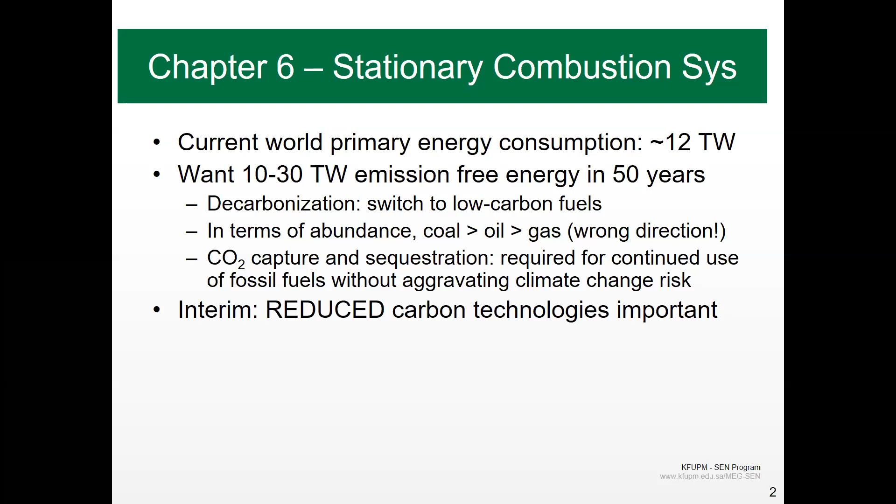Probably you've read that some countries in Europe have decided to go for electric cars 100% by 2035 or 2040, depending on the country, but there's some direction into going for electric cars in the future. They're going to replace, maybe not 100% in the next few decades, but eventually that's something to be expected.

Coal is being used heavily in some places like China, Russia, and the United States. There are grades of coal - some are cleaner than others, but it still remains an issue related to the carbon emissions that are products of the combustion process.

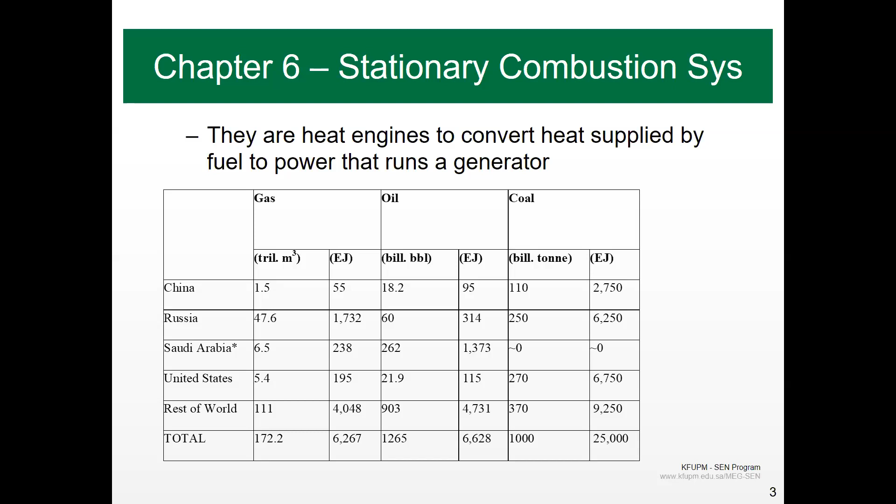Every now and then we get news about building the biggest world solar power plant. It was in Australia about a decade ago, and last year a bigger one was built in Morocco. So there is motion in this direction of generating electricity.

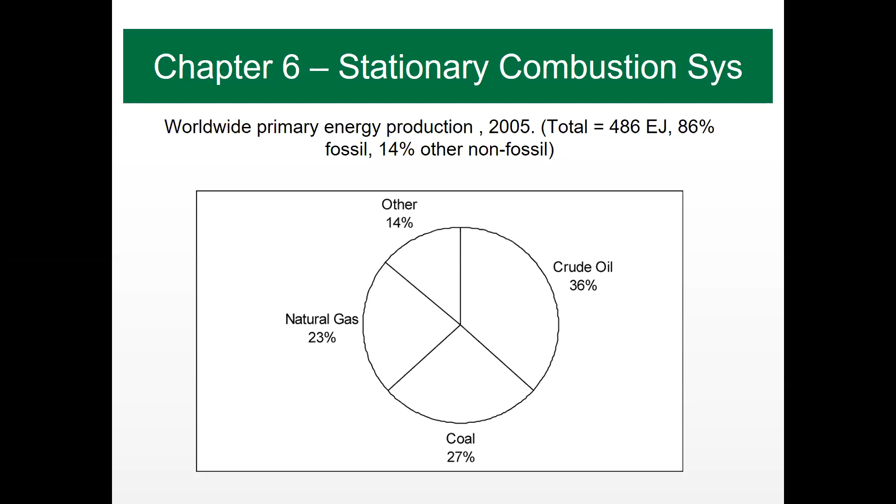Thermal heat was the major part in the last couple of decades. Now people are considering more dependence on PV, especially as the price of PV panels has dropped - the technology has become available and the price dropped in the last decades to about one third of its original price. So there's a continuous decrease in the price of materials that depend on solar energy, making investment in solar energy less significant than it used to be. Still, it's on the high side especially for capital cost, but this cost is being reduced as people move from one technology to another.

Fossil fuel availability, cost, and carbon dioxide emissions is something we're interested in, and this is being covered in the current chapter of the book we're getting into, the stationary combustion system.

The basic combustion cycles - we started last time talking about the Rankine cycle. We'll continue today talking about the Rankine cycle, probably give a detailed example of analyzing a problem with the Rankine cycle, and some improvements introduced to the cycle to increase performance in terms of efficiency and work done. Next time, two weeks from today, you're going to start considering another thermodynamic cycle, the Brayton cycle.

The Brayton cycle is the basic cycle behind the operation of gas turbines. Power production in the kingdom is basically distributed between steam turbines (Rankine cycle), gas turbines, and combinations of them. For example, the power plant located in Jubail by Marafiq Company has a combination - steam turbines and gas turbines together. The steam turbines are needed to operate desalination, water desalination units, while the Brayton cycle produces power.

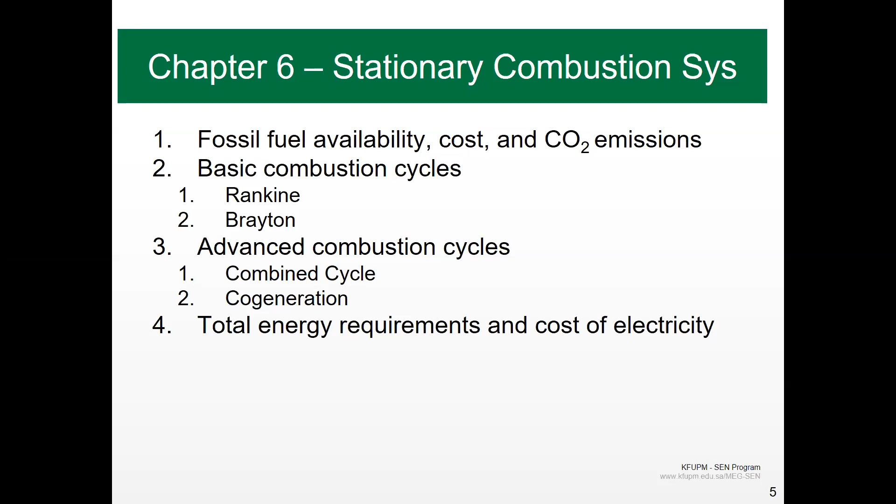The pump here has a process going from state 1 to state 2, which is compression of liquid water. Here we assume it's an ideal Rankine cycle, so basically there's no increase in entropy. Whereas from point 2 up to 3, this is a constant pressure line.

If you remember in the first class, we said that when you are heating water at atmospheric pressure or at a certain pressure, it goes through sensible heating first, and then after that, it goes through a constant temperature phase change. After all of it has been converted from liquid to vapor, it goes through an increase in temperature again. All of this occurs at a constant pressure.

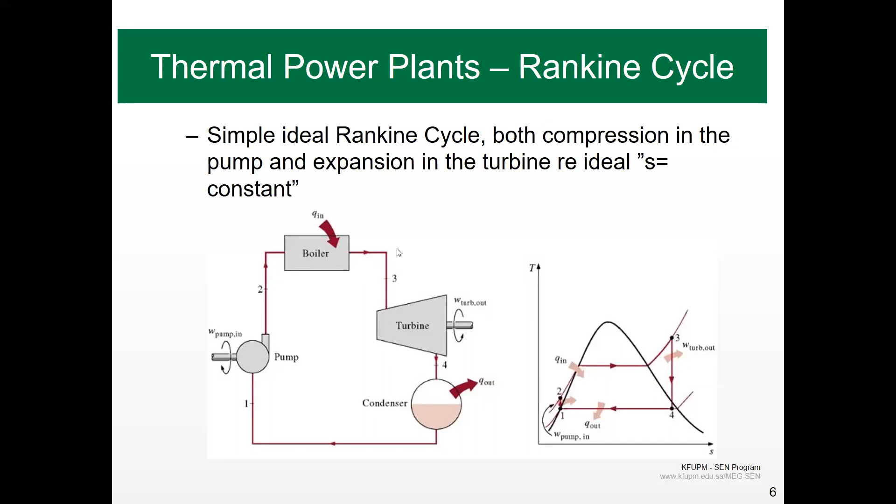But for our analysis, what we are interested in basically is the kind of irreversibilities associated with compression and with expansion. But we will always assume that this is going to be a constant pressure line.

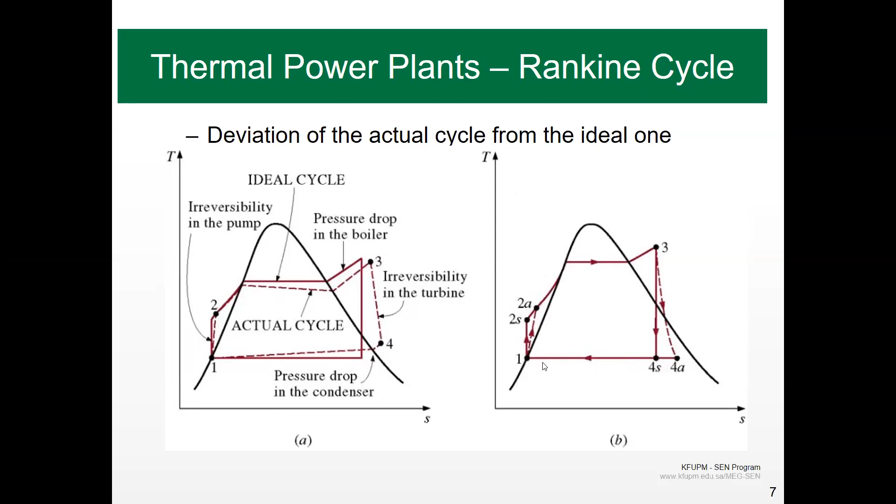Now, coming to another issue: if this is the Rankine cycle and you need to improve its performance, what can we do? Improving the performance means we need to increase the work done and the efficiency, keeping the heat input the same, which is what's being assumed in this figure.

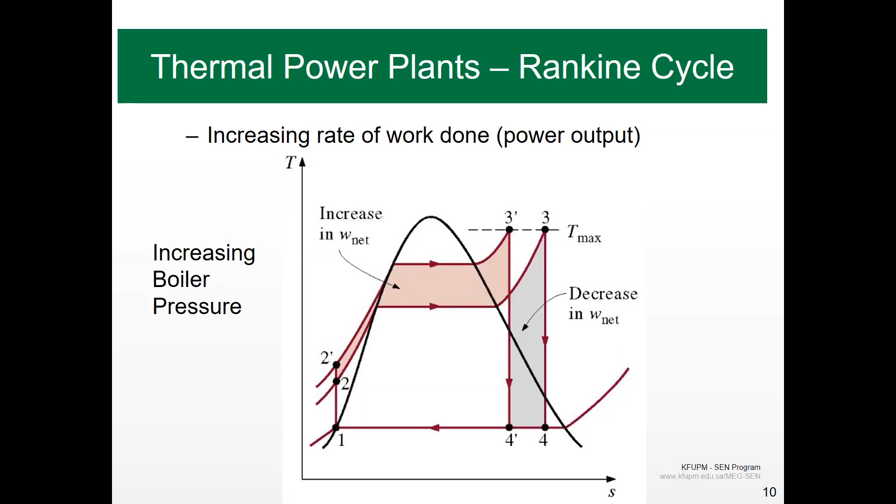Or maybe going for what is called a supercritical cycle, in which you increase the pressure to a value beyond the critical pressure of H2O or water, and hence you are basically going above the critical point and reaching state number 3. Then you will have a substantial increase in the work done. But Q is going to increase as well, as is the power needed by the pump. So again, that's something that needs to be looked at—how much benefit we are going to get out of doing that.

So we're talking about four types of processes that we can use to improve work done and efficiency of the cycle: decreasing the pressure of the condenser, increasing the degree of superheat, increasing the pressure of the boiler, or even going for a supercritical Rankine cycle.

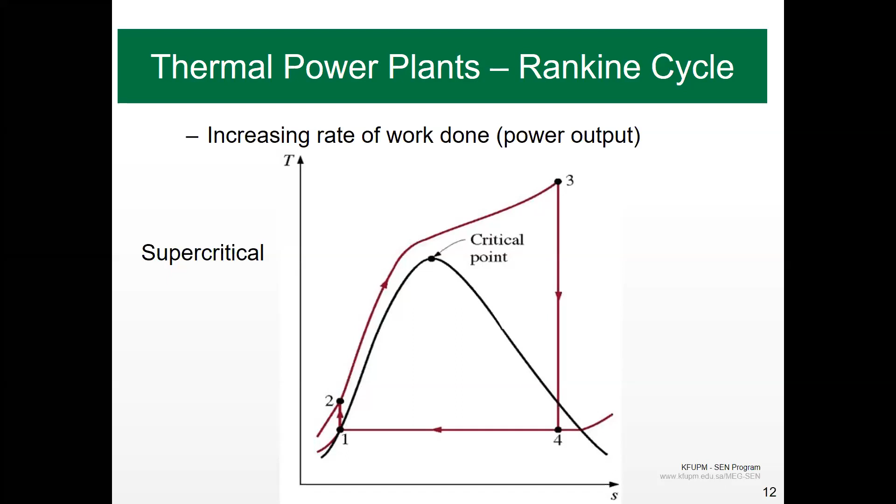But these are not the only ones. There are other ways you can improve the performance of an existing unit without having to increase or decrease pressures. These are basically comparisons considering 3 of the 4 scenarios that we talked about.

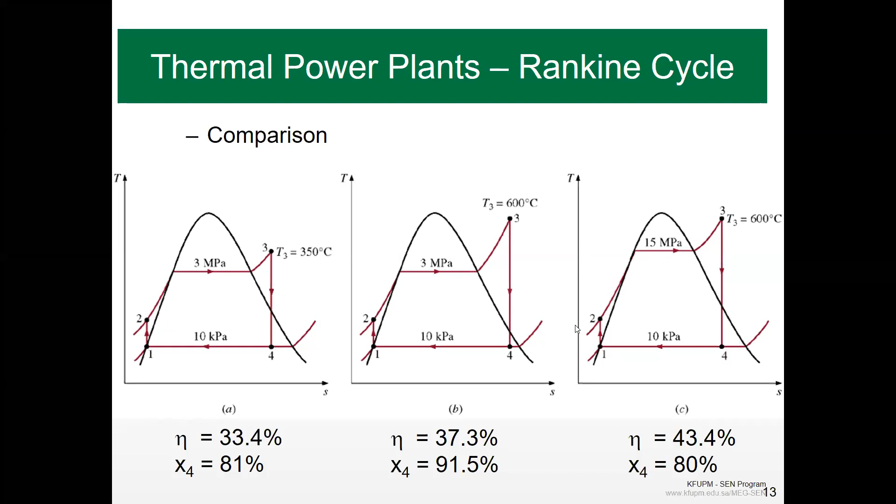There's a solution for that, and it can be done in a process we call reheating of steam. This is what we need to talk about now. You might divide the expansion in the turbine into two processes, so you have a high pressure turbine and a low pressure turbine. The steam that is expanded in the high pressure turbine is taken back again to the boiler to be reheated. That's why it's called the ideal reheat Rankine cycle. You reheat the steam leaving here, then admit it to a low pressure turbine.

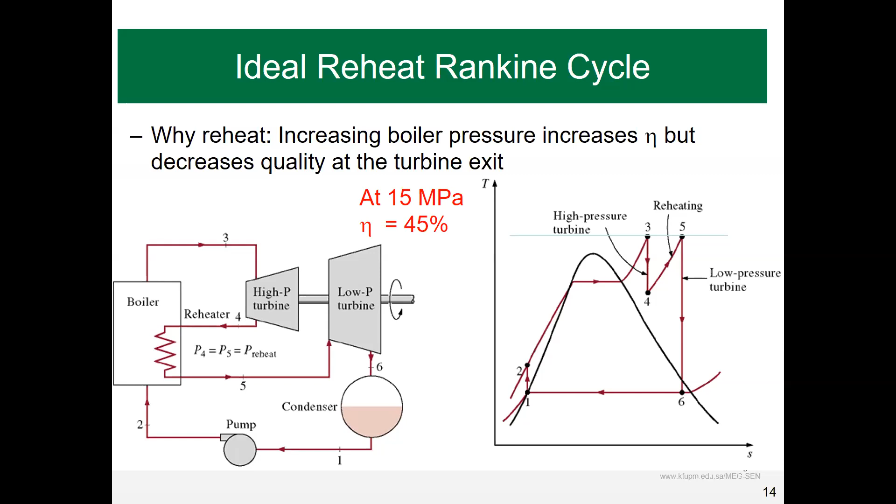This looks like a theoretical thing, just imagining ideally what would happen. In reality that does not occur, but what we can do is approach as high a temperature as possible for the inlet to the boiler, and this is done by using more than one feed water heater.

So this is the idea of regeneration. The water that enters the boiler goes in at a low temperature and is heated to the maximum cycle temperature, so we're talking about an average temperature which is somewhat low. We need to increase it, because doing so gets us closer to the idea of the Carnot cycle. This can be done by reheating, but that's not enough—it can also be done by regeneration.

So that we bleed or extract a portion of the steam in the turbine, and use that for preheating the feed water which is going to feed the boiler. That's why it's called a feed water heater. So the device in which heat is added to the feed water is called a feed water heater.

Regeneration has been found useful in processes other than just heating the water. In the condenser, which is a low pressure process, as vapor condenses there's a possibility of creation of non-removable, non-condensable gases. Air can leak into the condenser, since it operates at a very low pressure, so air might leak inside.

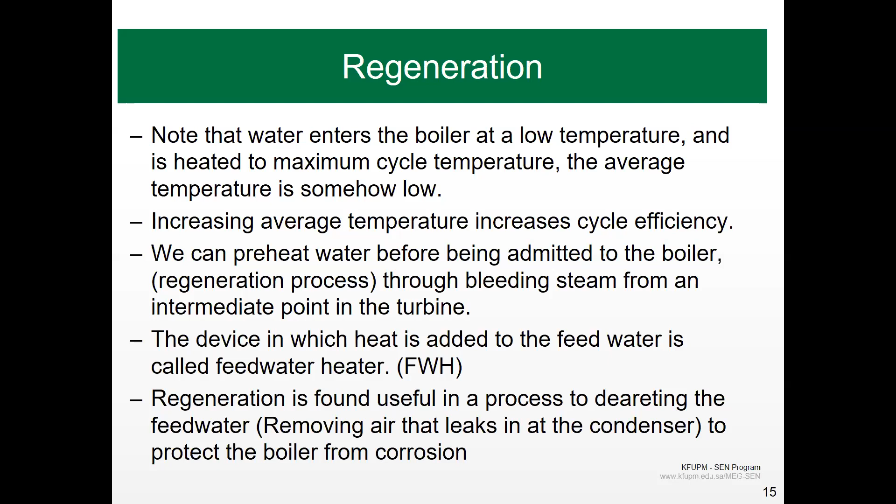We don't want air admitted to the boiler at all, because with the high temperature in the boiler and air present, oxidation would occur and result in corrosion. So we need to avoid that, meaning we need to remove air from the water that will go into the boiler. This is a process called de-airing or deaerating the water before it gets into the boiler.

One of the feed water heaters is an open type feed water heater, and it is working as a deaerator at the same time. So you are preheating the water in a preheater. Meanwhile, you are taking out air from this stream, and that enhances the performance of the whole cycle. So that's an open water heater, which is nothing but a mixing chamber.

Someone had a question? Yes, go ahead. So you are saying that we will be using a deaerator only if we have a feed water heater, is that correct? Actually, what I want to say is that a feed water heater is a deaerator at the same time.

The feed water heaters are two types: one is open and the other is closed. So if you are going to have a power plant, we might need only one open feed water heater, and 3 to 4, up to 7 practically speaking, closed feed water heaters. We need only one open feed water heater to work as a deaerator, and the rest are basically closed feed water heaters.

So what I want to say is most, or actually all, of the modern plants that are operating used to have feed water heaters. That's something which is standard to the technology now, because it's a tool to improve performance.

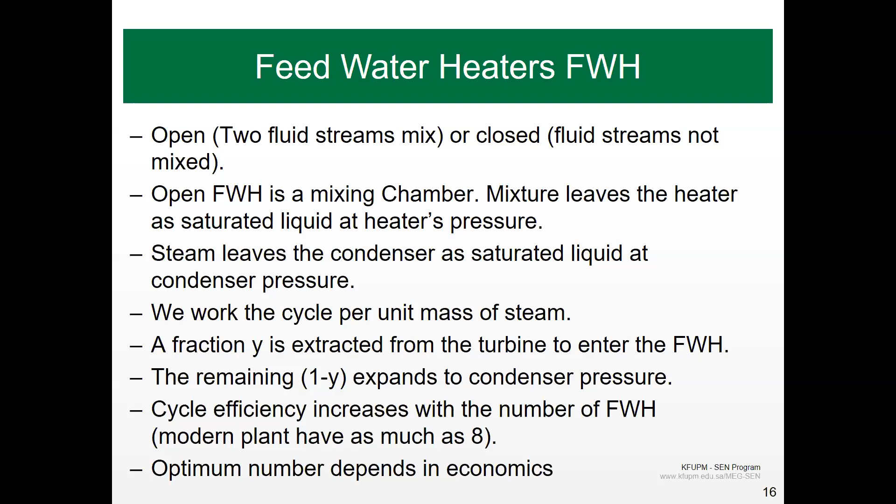Saturated liquid goes to the pump, where it's pumped to a higher pressure, becoming a compressed liquid. Then it enters the feed water heater, where it mixes with a line of steam extracted or bled from the turbine.

This line of steam operates by heating this stream of water. The mixture occurs because this is steam coming in and this is water; the steam condenses into liquid, giving off its energy to that stream of water, so the saturated liquid leaves here at a higher temperature.

It will enter the second pump, where it's pumped to state number 4, and then the whole stream goes to the boiler for heating, superheating, and then it expands in the turbine at an intermediate pressure.

At this point, extraction occurs - fraction Y is extracted, and the rest, which is 1 minus Y, expands, condenses in the condenser, and goes to pump number 1, and the cycle repeats.

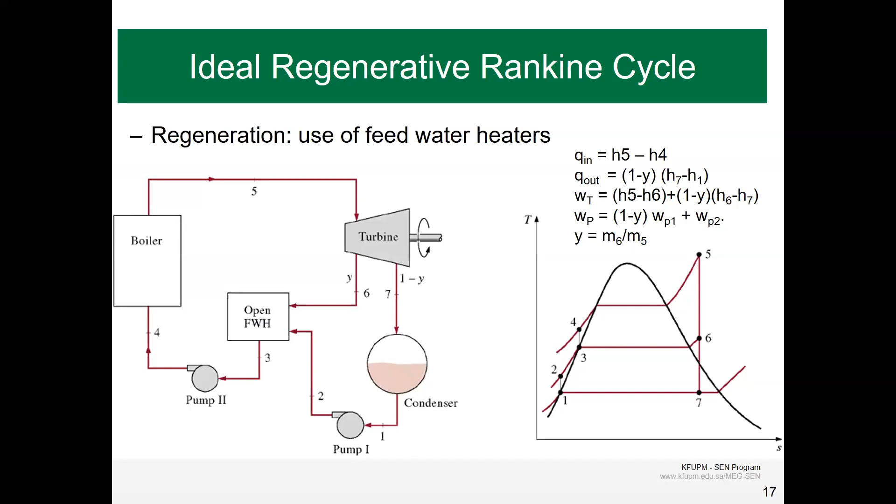So that is what you see typically in heat exchangers. You have a tube side and a shell side. The tube side has liquid water that's pumped through. This liquid water receives energy from the steam, and the steam condenses on the outer side of the surfaces. Then the condensate is pumped to the next one. So here they are not mixed with each other.

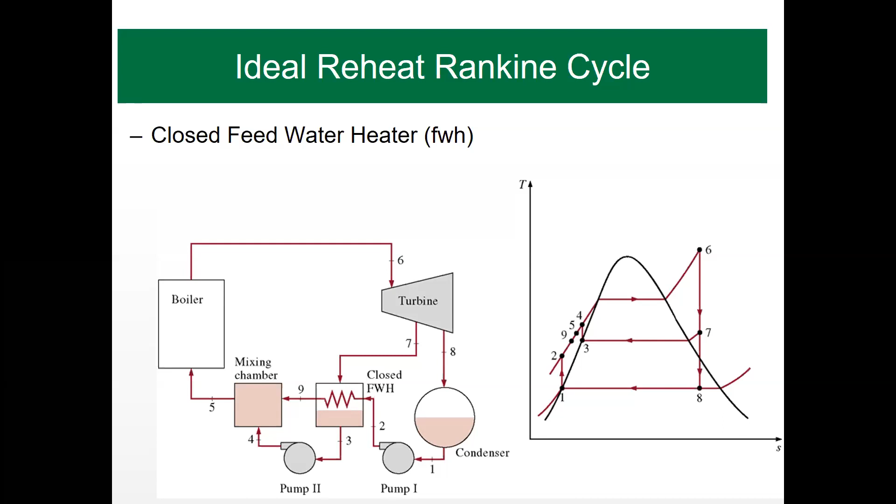Actually, you have a high pressure turbine, intermediate pressure turbine, low pressure turbine, or high pressure turbine, intermediate pressure turbine 1, intermediate pressure turbine 2, intermediate pressure turbine 3, and low pressure turbine. So basically, it's not one turbine, but more than one turbine there. Expansion goes from one to the other depending on the points of extraction that you want. Actually, as a matter of fact, this should have been drawn as 1, 2, 3, 4 turbines, for example.

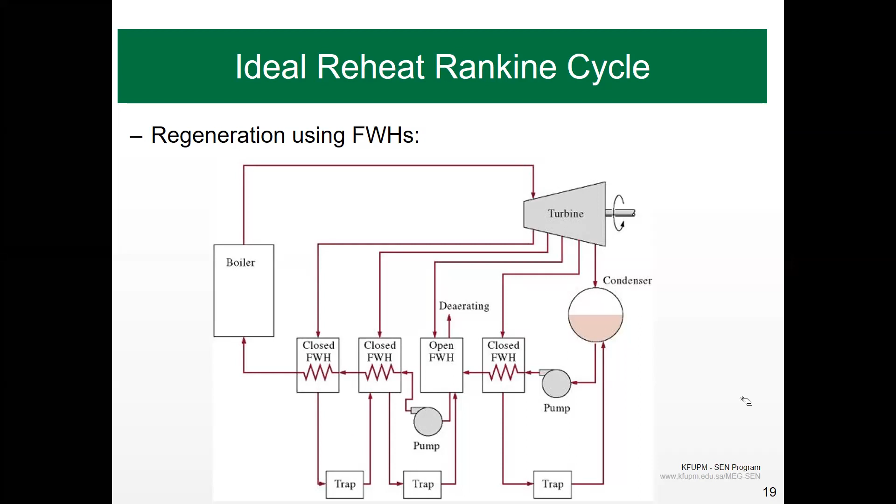Suppose you have a power plant located in a chemical plant, and you need heat, for example, for a distillation column. You should not get a separate source of heat, but you can extract a line of steam coming from the turbine, and that produces the heat required for your process. So the process here could be a process heater, a desalination system, or whatever. The point is you need some heat obtained from that whole operation, and then you operate something else in addition to producing power from the power plant.

This is typically found in desalination systems where you have a Rankine cycle. You take a line of steam from the turbine and admit it to something we call the brine heater, so that you heat the seawater to a top temperature of about 120 degrees or 115 degrees, and then you take this hot seawater and convert it into fresh water. You needed energy there, and the energy is basically obtained from a power plant.

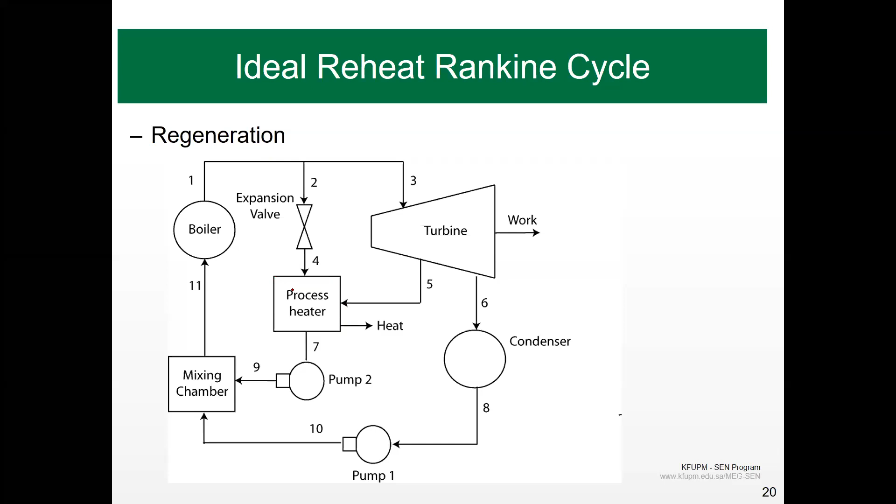Here I'm calculating the pump work for each one of them, which helped me calculate the further enthalpies H2, H4, and H7, as one way to do it.

The closed feed water heater, which is the one in the middle, has Y quantity of steam entering at enthalpy H10. There is a Y quantity here, the flow rate is Y at enthalpy 10. This is one inlet. The second inlet here is 1 minus Y at enthalpy H4, which we already know. This is leaving at H5, we know it, and the quantity is 1 minus Y. At H6 we know it, and the quantity is Y.

So the energy balance for the closed feed water heater is: Y times H10, plus 1 minus Y times H4, equals 1 minus Y times H5, plus Y times H6. We know H5, we know H6 which equals H5, we know H4, and we know H10. The only unknown here is Y, and Y here is 0.17. So 17% of the steam has been extracted here at the high pressure turbine.

That is clear, but it will be helpful if you explain it on the previous page, like point 8.9, sorry, there was one previous before this, before. We're here, yeah, we're here. So fine, it's point 8 and 9. This is at the boiler, and then points 10 and 11 are after the high pressure turbine.

So how is the energy added here? I'm not getting it - I did not add more fuel. But what happens here, I'm talking about a boiler where fuel is burned and there is very high temperature inside. Has this high temperature converted all of this fluid from compressed liquid to superheated vapor? And then it has expanded, and by expansion its temperature and pressure have reduced.

You are going to take this steam in a pipe and make this pipe go inside the boiler again. Then it will return back at the same pressure, but after being reheated to this temperature. When I've done that, I sent it to the boiler internally. Again, if we consider that we have sort of a...

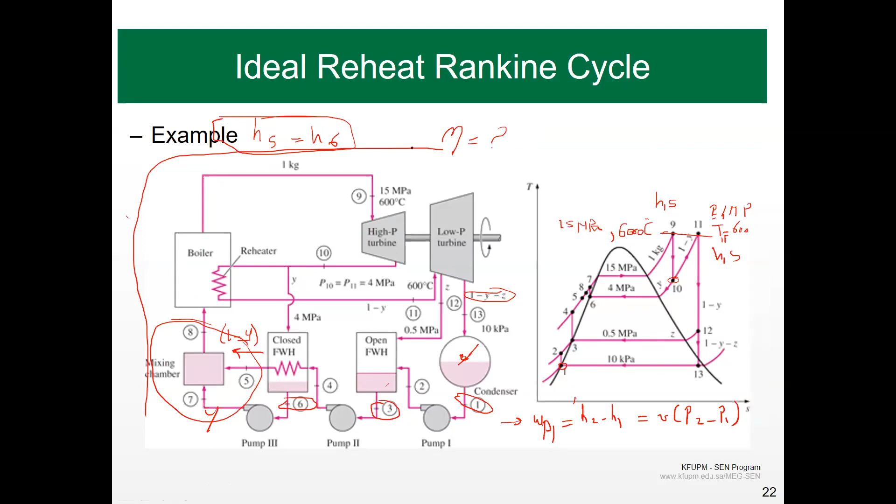If you put like a fence in the whole system we have here, what's going to cross this? I'm going to bring fuel in, bringing it to the boiler, not to a section of a boiler, but to the whole boiler. And here there is work,

and here there is energy out, because water from the lake is going to come here. It's going to absorb energy from the vapor and convert it into liquid. So it will come in with a low temperature and leave with a high temperature, and this is how the energy is being rejected. So what crosses this boundary is only heat input to the boiler, energy output from the condensation, and the useful work we are getting from this unit. This is still an internal part.

So our starting point in the power plant is in the boiler? Normally it depends, where do you start? Sometimes, like this problem, we're starting from here, from point number 1. We called this number 1, but you can start from any point because it's a cycle. You're going to start from a point and return to the same point again. So define your starting point - if you want to put the input to the boiler at point number 1 and start from there, that's fine.

You see, when you have a circle, it doesn't matter where you start from. But I mean, at the beginning, at the commissioning of the power plant, I usually start to put the fuel into the boiler. Yes, to start up the boiler, this is what you do. You put fuel in, but before you turn the fuel in, you have to run the water into the system, because water is the one which is going to absorb the energy. Otherwise, overheating of the tubes of the furnace will occur and it will damage them.

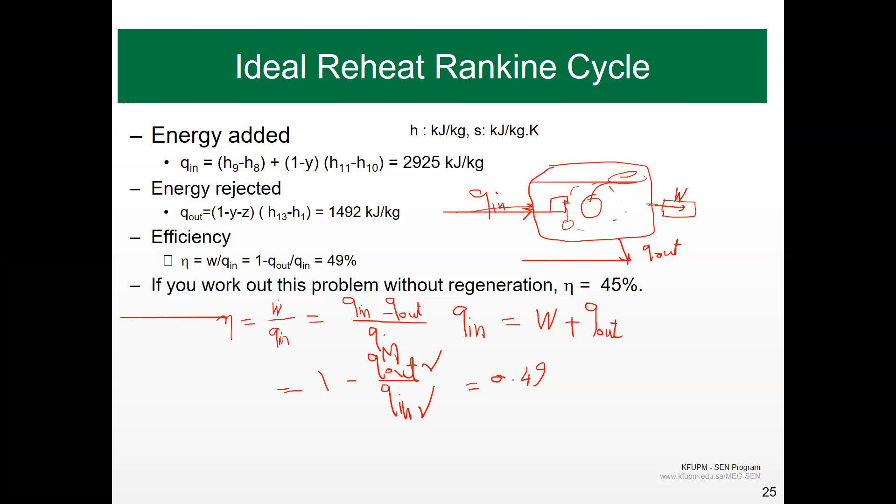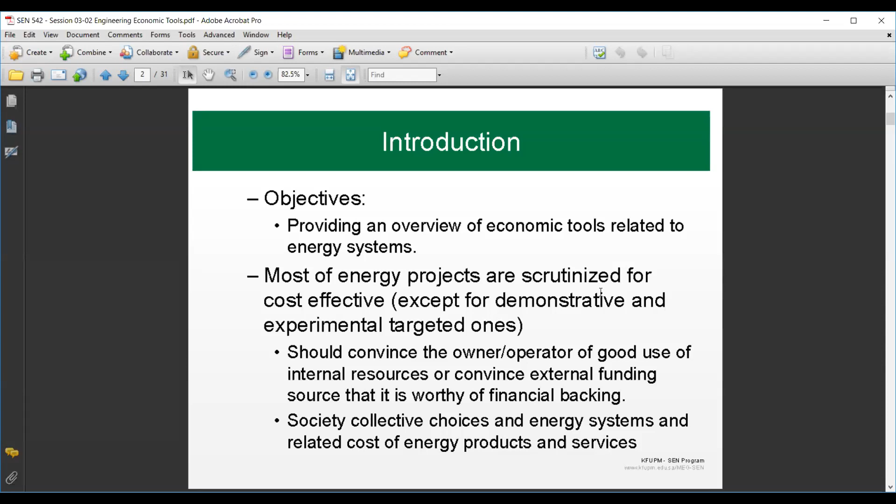One way, you should convince the owner or operator of the good use of resources. The external funding agency, you have to convince them that the project is worth financing so you can guarantee financing for the project. Also, some decisions can be made with society's collective input - the majority of people has to be convinced of this kind of project, and then they will support it.

The project doesn't have to be over-budgeted, and it doesn't have to be under-invested or underestimated either, because both are going to affect the performance of the project, whether you neglect or consider the existing stock of energy or infrastructure. For example, you can have a very sophisticated network of trains, but not enough investment to maintain it, keep it running, and expand it - so under-investment is going to be a problem. Over-investment makes it very costly; under-investment affects the performance of a project.

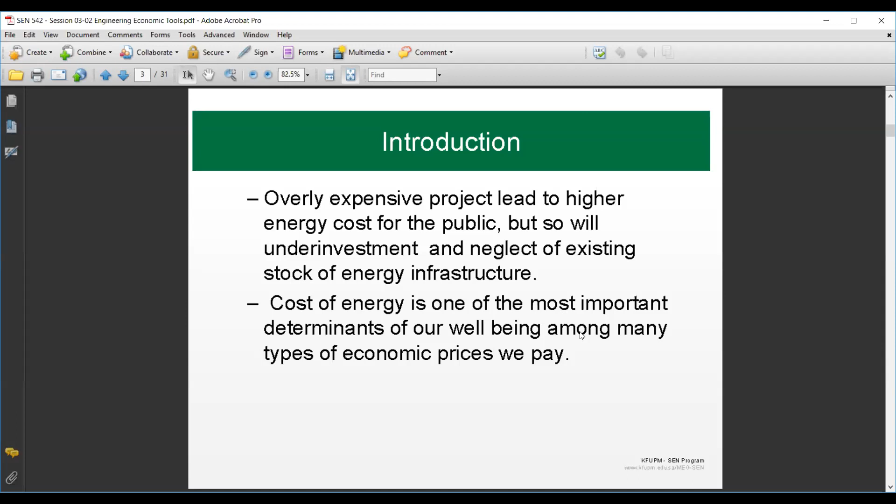The cost of energy is one of the most crucial factors that affects us, because that's going to make the energy available. And as we have seen in the introduction, availability of energy more and more is a measure of prosperity of communities as well as countries.

The whole idea that the chapter is going around is that the value of money decreases with time. If you have a dollar 10 years ago and you could buy something, right now you cannot buy it with a dollar—you have to spend more than that. So the value of money is going down, and it is going down by several factors, one of them, or the major factor, being inflation.

Investors expect to have a return on investment. Even when you put your money in a bank, you expect something to come back that would not make the value of your money go down, at least to keep the same purchasing power. The number will increase in the account, but will it be able to buy the same thing it used to buy 10 years ago or not? This is the issue. And what about even making a profit out of that? These are some of the issues that the whole chapter is centered about.

The idea of time value of money was one of the things looked at with great focus. Tracking inflation is very important, and there's even some sort of index to measure that. Governments usually go to a basket with some major elements that people use for buying, and they make what's called the consumer price index, so that a certain amount of goods collectively together can be tracked—there are even applications on the mobile for this.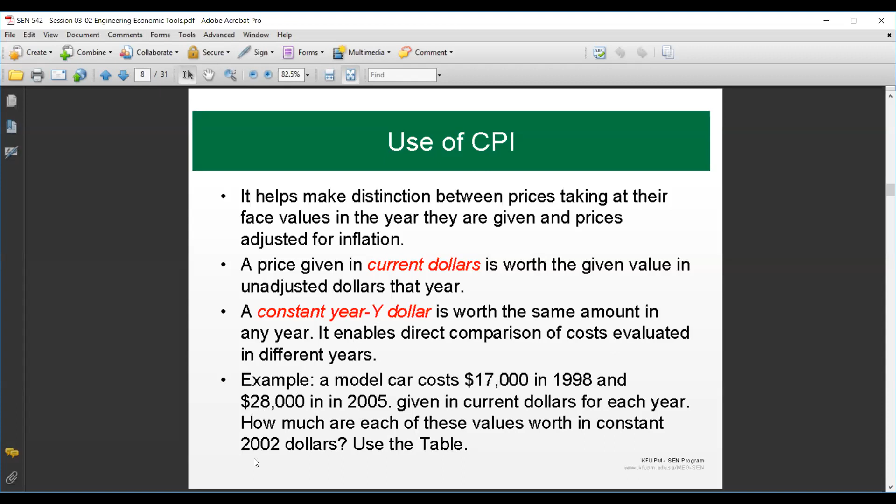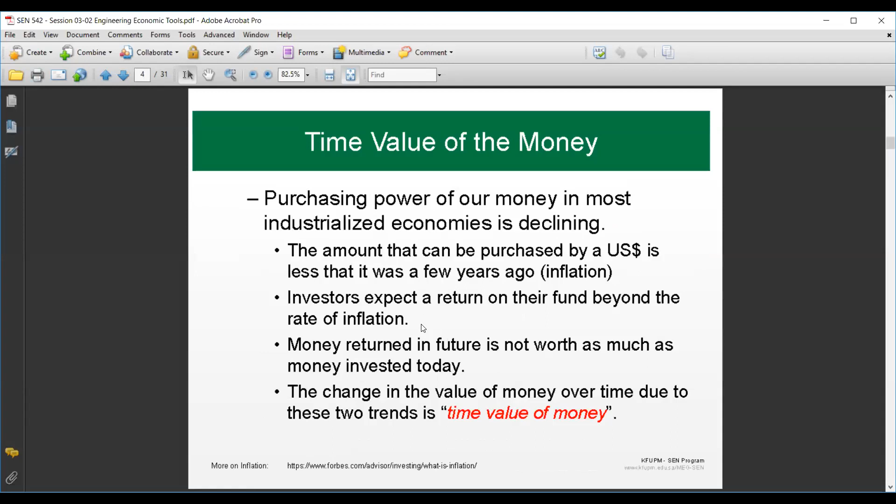To do that, we are going to make use of this index here in the year 1998, which is 94.7, and the year 2005, which is 113.4. Definitely the year 2002 is the one that has this value of 104. So we're going to normalize between this value and this value, and normalize again between the 113.4 in 2005 and the 104.5 in 2002.

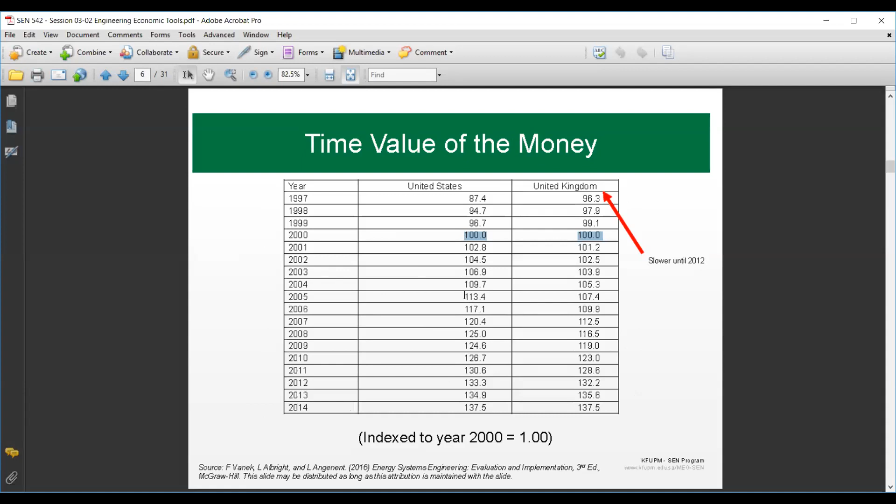And the values are calculated - it's a simple ratio here, you multiply by the CPI in this year to that year. We are getting that 1998 could have had a value of 18,763 in 2002. The 2005 value in 2002 should have been 24,986. But these are not the same, which means that the increase of price that happens from here to here is not only because of inflation, but there is an increase of price accordingly with this.

Probably you could have seen that, maybe you were not aware, in 1980 for example, what was the price of a sedan car here and what is the price now, and you find that the difference is big.

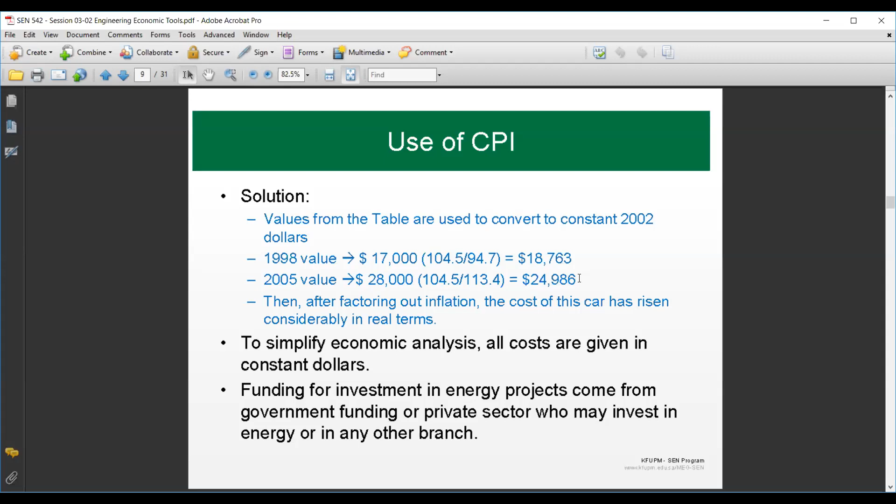So now the issue is, are we able to compare or not? For this example, we had to normalize it over a certain value of a dollar over a year, and accordingly we could judge whether the increase is only due to inflation or not. We will need to do that for investments in projects in general, and that's why came the idea of present value, future value that can be used to take care of this issue, the inflation issue.

So the CPI is going to show options, which is, should we invest now, should we not invest, or should we invest the money on something else? That's an issue that the CPI is going to help us with.

For us as consumers, we have the consumer price index, but for manufacturers, they have another index, which is concerned with the kind of input, whether it is investment in capital cost or the running cost for the plants, so that they can see whether they are able to sustain their business or not.

The issue of money value decreasing with time has been considered in what's called discounting, which means it takes care of the reduction of the price or value of money as time passes. I got this definition of discounting from Investopedia: it's called the process of determining the present value of a payment or a stream of payments, could be annual payment for example, and reflecting the deterioration or decrease of the value of money with time.

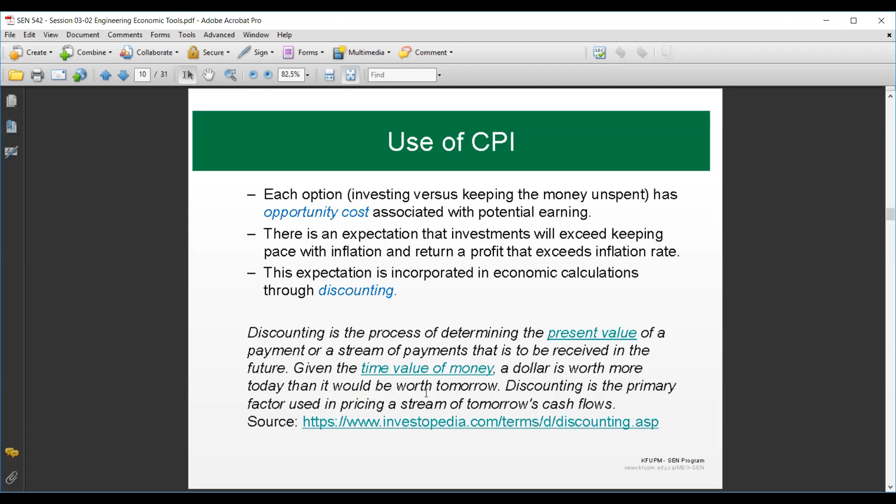Now there's some terminology which are always used, talking about an energy project for example that somebody is going to invest on, and this project is going to last for how many years before it becomes obsolete. This is basically what's called the term of a project - what is the project lifetime? It's given in years, capital N. Initial cost is basically related to the assets.

The annuity here comes from two things, the cash flow in and the cash flow out, which are the expenses, and the net value, the net positive value. If it's positive, then it will be good. If it's negative, then it will be a problem in the system. So it can be considered as a net amount of flow after considering the positive and negative flows in and out, so that a project should have a positive annuity to repay for the investment cost. Otherwise, it will be losing and failing.

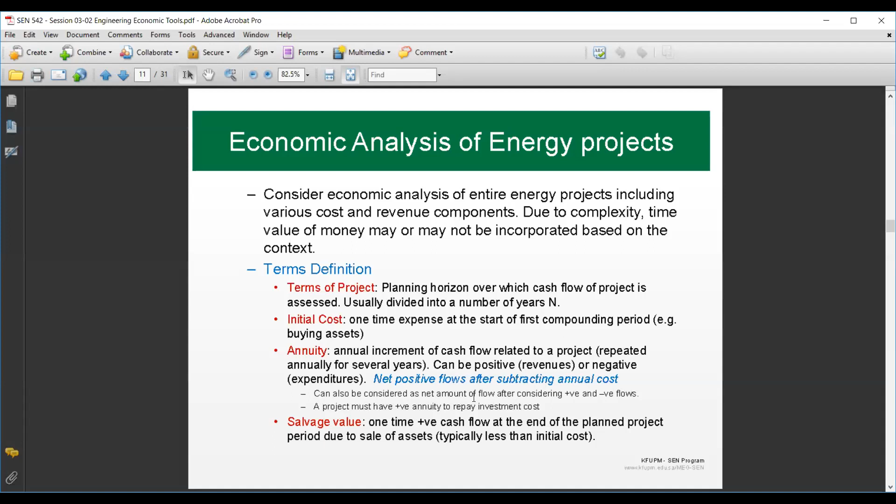The salvage value is the value of the assets toward the end of the project. Suppose somebody has bought a car and he's using the car for 20 years - what's the value of the car after the 20 years? This is the salvage value, when he's going to just get rid of it.

Evaluation can be done with or without discounting. And now the time domain is important, because you may have a system which is producing, for example, a certain amount of profit now, but over the years, the value of the profits gets down. And this is what's meant by discounting - is that something we can consider in our analysis or not?

The book is saying simply that for short-term projects, you may not consider it, but for projects that extend for a longer number of years, this is definitely a must. If I have a project of about 2 to 3 years, I don't expect the currency to be affected much in that period.

It may, but generally speaking, it would not be a significant change. But over a longer period of time, that's something which is expected. There are different ways to look at that, and different methods for analysis, which are listed in this chapter, and a summary is given in this presentation.

Net present value is a way that you can add up all cash flow in and out of a project and calculate the net present value currently. If it's positive, the project is financially viable. If it's negative, you should look for another investment.

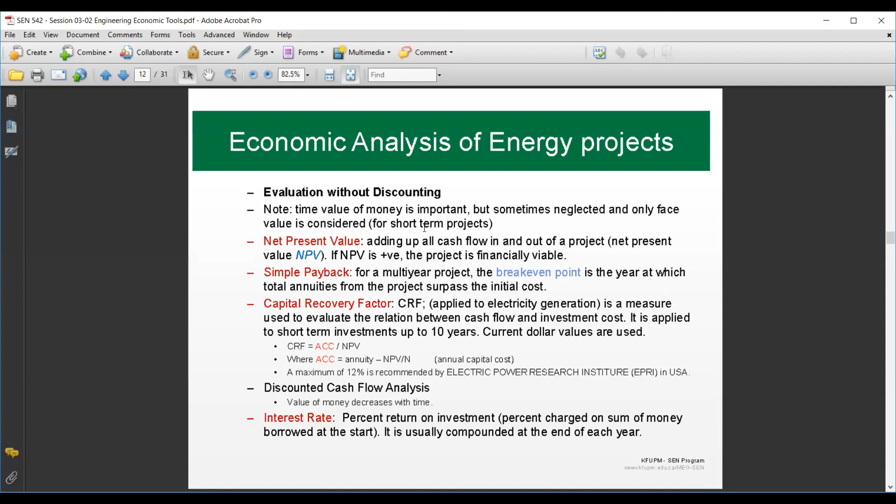We've already talked about net present value, sorry. There is another factor to consider, called the minimum attractive rate of return, MARR. It basically takes care of the reduction in the value of money, and is normally concerned with three reasons for using it.

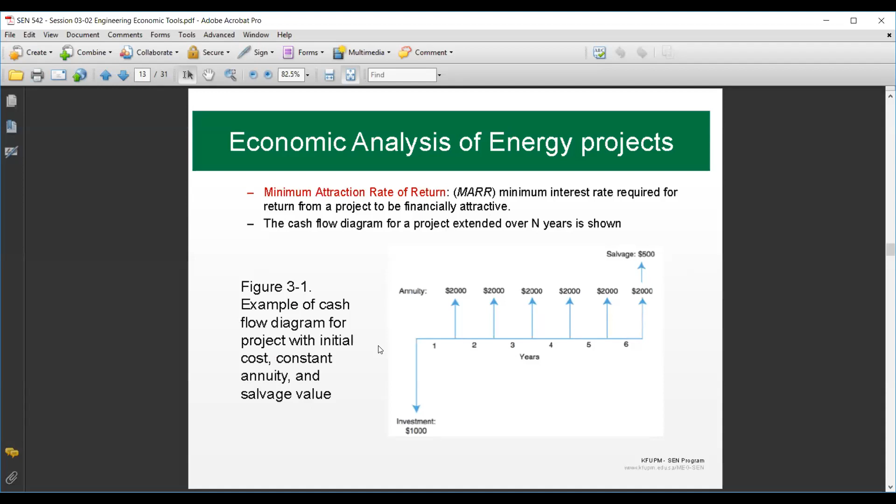One of them is inflation, and another is related to the kind of risk associated with the investment. Are you going with an investment of high risk, especially if you are going through an unproven, new technology that you don't know whether it will work or not? So a risk factor should be taken into consideration.

And would it be wise to spend this cash on this kind of project, or look for another one? Sometimes spending on an energy project is not as profitable as you'd like, so you would rather go to a different kind of investment. This can be fine for individuals, but not for governments, which have to secure a certain amount of energy flow.

The issue of MARR comes from this simple example: if you are promised $1 now or $1 next year, you better take it now, because the value decreases. But if we compare $1 now with $1.xx next year, this fraction takes care of these elements we're talking about—inflation, risk, and return. So you might say, I'll accept it tomorrow, but only if I'm accepting a MARR of 10%, then I can accept $1.10 next year.

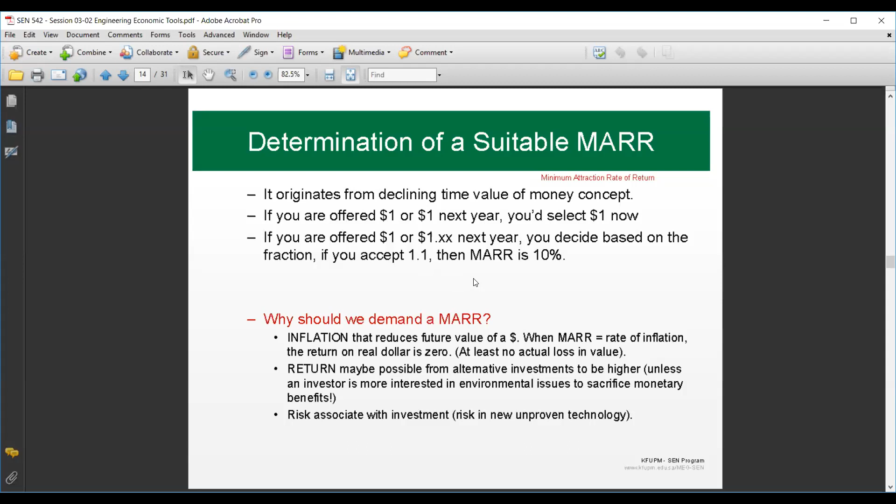Before we conclude today, the issue of identifying the present and future values of a single cash flow element can be given by these relations. Future value is related to the present value by this formula, where I is the interest rate and N is the number of years.

The present value is related to the annuity, which is the net cash flow every year, or if there are installments on the capital cost, they have to be accounted for. The present value based on the annuity is calculated by this relation, where I is the interest rate, N is the number of years or span of time for the project, and the future value also can be calculated from this relation.

So we're now talking about present value P, future value F, annuity, and the relation between them. The way notation is given for these expressions, for example the second one, P is equal to A times this fraction, is written as P over A with a certain interest rate I for number of years N, and they call it P given A. So we are given the value of A and we calculate P, or P given F, or F given P. That's the way they term this kind of expressions.

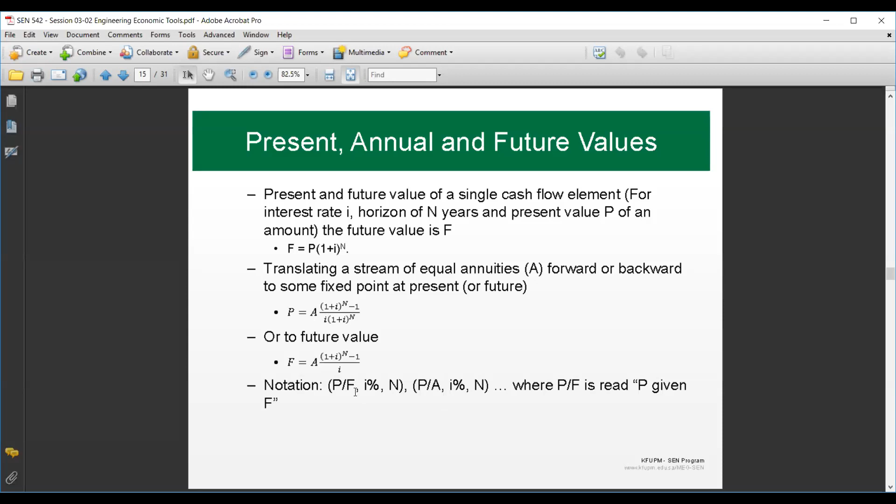An example is given here. Maybe we can use this example to conclude this session, talking about a cash flow that consists of an annuity of $100,000 earned for 10 years at a 7% interest. What's the future value, the F-A value in this case?

Future value relation to the annuity here. So the relation is given in front of us: F is the future value, A is the annuity, 100,000. I is the interest rate, which is 7%, and N is the number of years, a 10 year span of time. Then the future value based on this annuity is given to be this quantity, 1,381,645. And the F-A value, the ratio between F and A here, is 13.82.

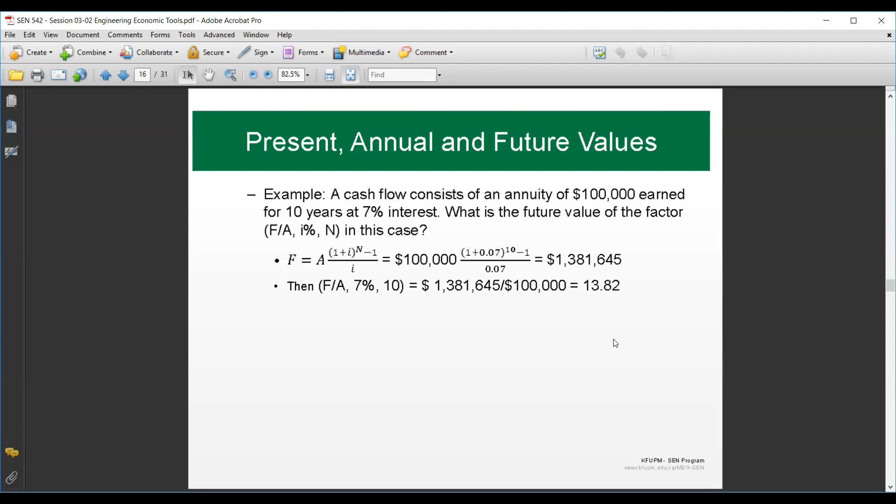Note that in that example we are considering the value of 100,000 to be constant. We did not account for the degradation or decrease in the value of this 100,000 with years. To do that, there are ways to account for this calculation, which basically take care of present worth. We're going to talk about that here.

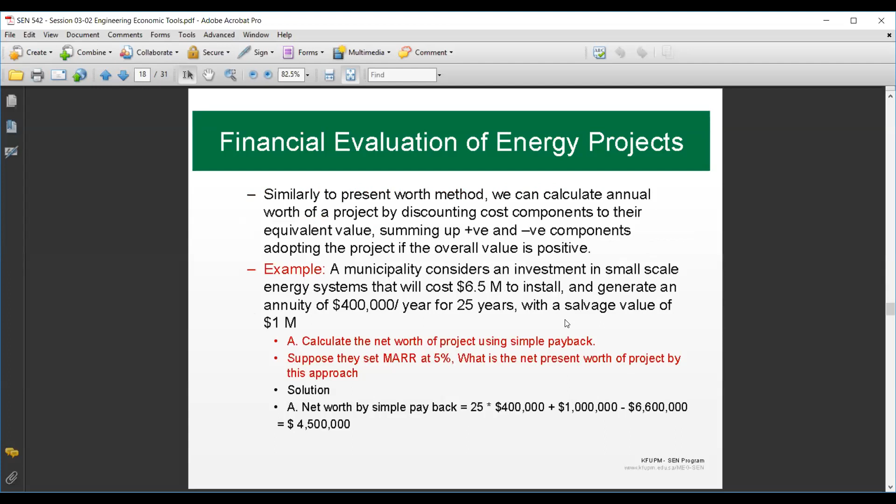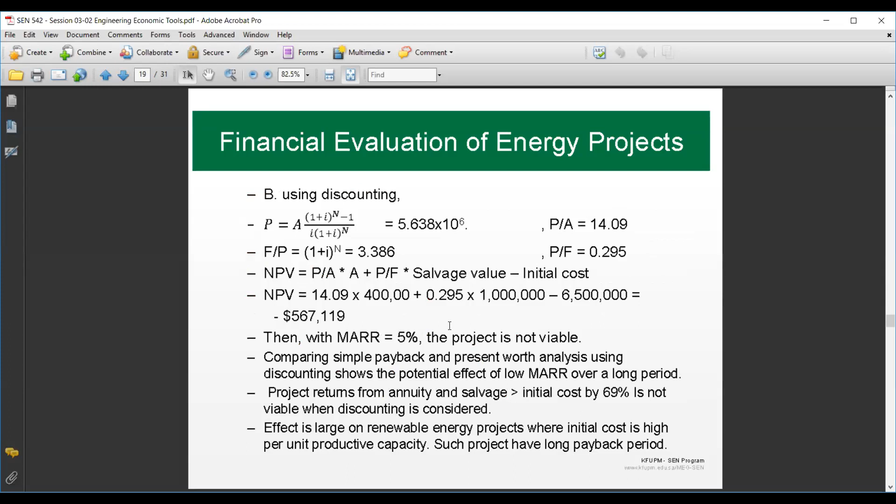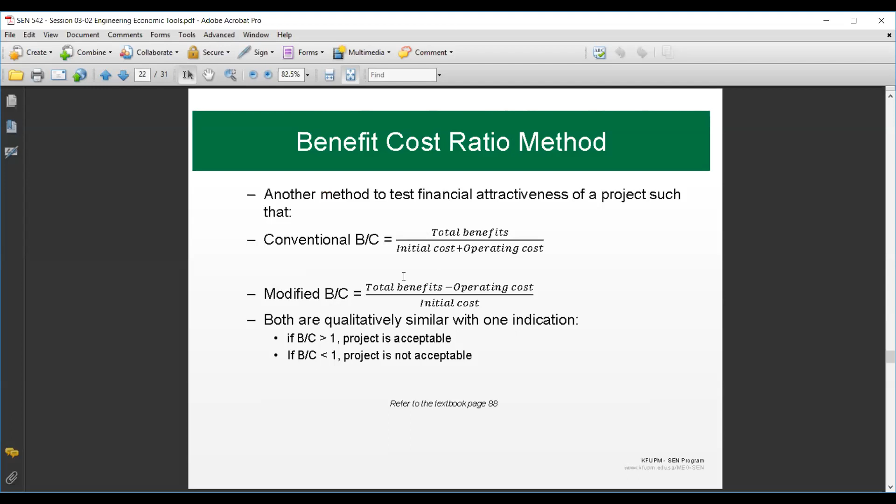And there is also the benefit to cost ratio method, so you can see whether all of that is done for one reason: just to get an answer, is this project with this information viable for budgeting or not? Then present worth, benefit to cost ratio, and the internal rate of return value. All of them are different means to calculate the same thing.

Now it depends. Normally PW is considered by both government and private sectors. The B over C, or benefit over cost, is considered basically in the public sector, whereas the IRR, the internal rate of return, is considered by private industry. So all of them just mean the same thing. They are some sort of simple formula that can be used to answer this question: shall we go ahead with this proposed project or not? Is it worth budgeting or not?

As I mentioned, I'm putting a couple of Excel files that give more detail into two examples. There's something like 6 examples in this chapter. 3 of them can be solved in 1 or 2 lines. 2 of them, example number 4 and example number 6, need substantial calculations for every year over the project lifetime. That's why I put them in an Excel file, and I've shared the Excel files with you on Blackboard.

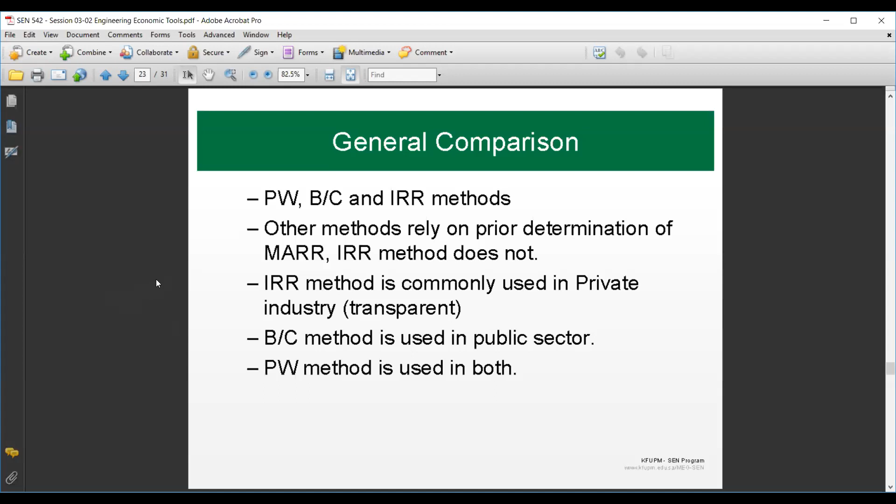As I said, you are going to get much more in-depth exposure to this in the economics course of your program.

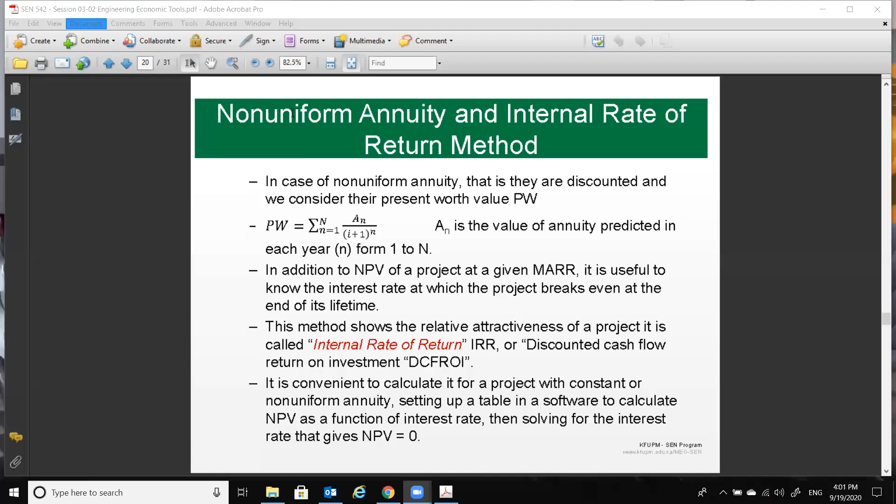Yes, go ahead please. For the class of today, where can we find the book? We have the textbook of the material and the other book, which is thermodynamics. What I covered today you will find part of it in the textbook in chapter 6, the start of chapter 6. But chapter 6 does not have this kind of detailed analysis for the power plant, and this you will find in the thermodynamics book.

Let me ask you which chapter you have in the thermodynamics book, because it has changed over time. Which edition? We have the 8th edition. Oh, actually I have the 7th, which I was building this over, and you will find it generally in a chapter called vapor and combined power cycles. In my version it is chapter 10. I'm not sure you will find it in your books, either chapter 9 or 10.

Okay, and the part of the economic analysis that we talked about today, you'll find it in chapter 3 of our course book. Module number 3, the one that we are having today, I'm just opening it. I hope you'll be able to see it.

In this module here, we have basically what we covered today. I added a study guide from the book. This is a summary of the book, talking about the first law of applications. I'm emphasizing here that you look at it from page 20 to page 54, talking about elements of a steady state, steady flow process.

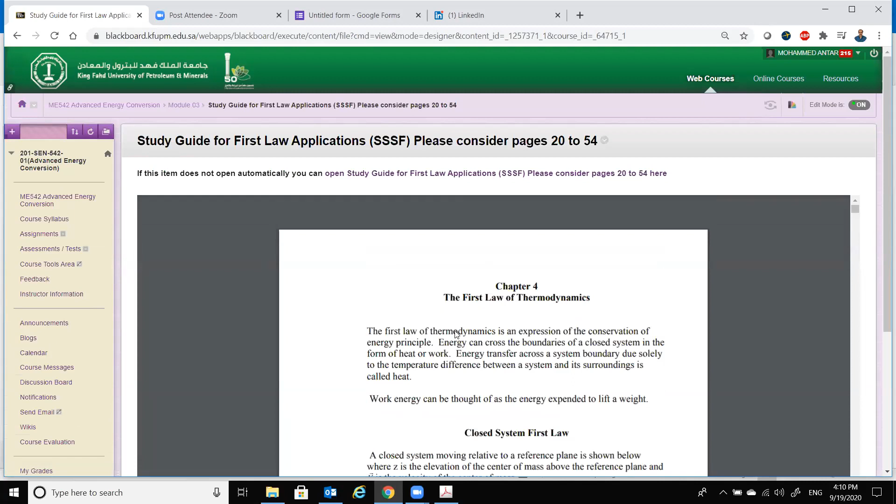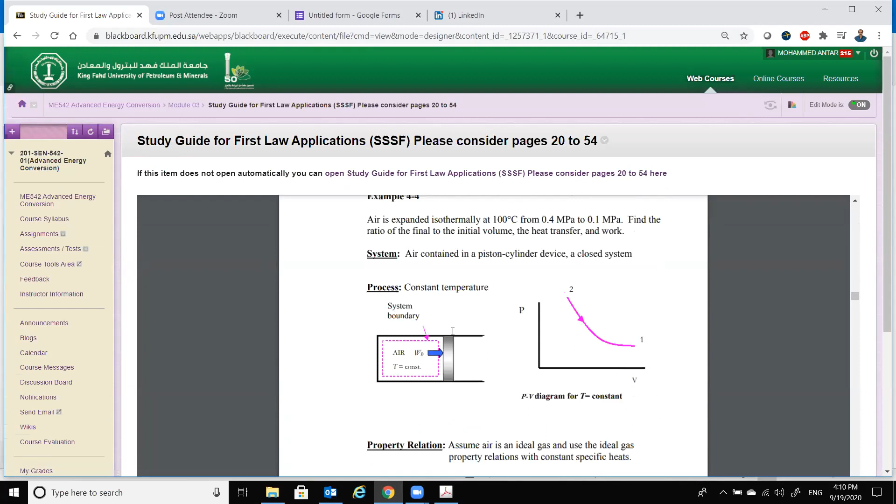The link, I'm opening it here, if you are able to see it. Yes, actually it is going from the very beginning through the closed system, which we're not covering. Actually, we said that what we need to focus on is basically the open system, and that starts from page 20, if I'm not mistaken.

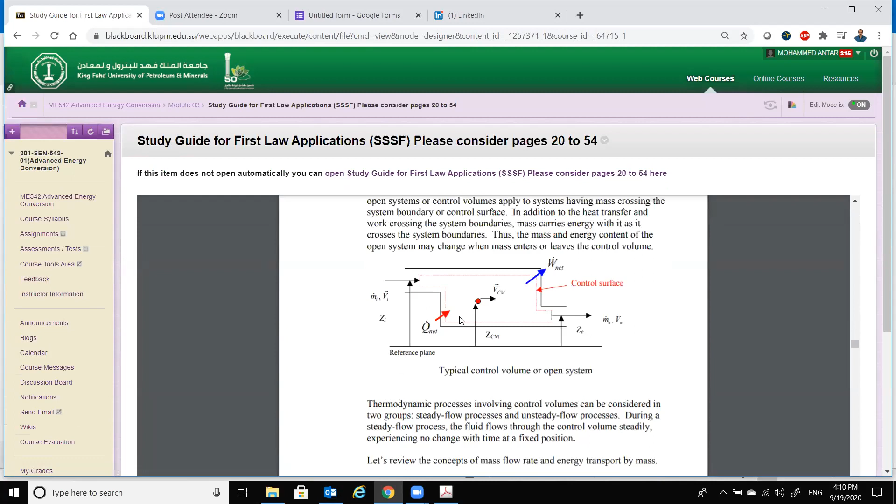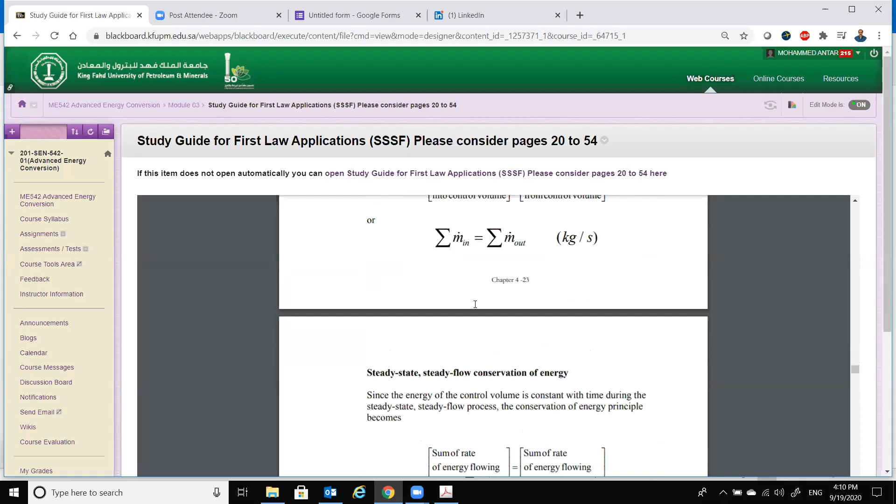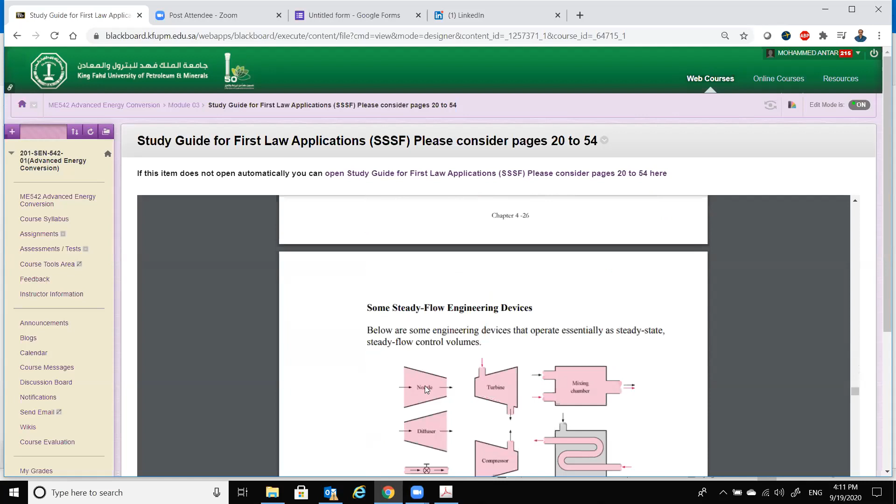And then it's talking about the energy equation here in details, and I think it will give component by component with even some examples given here, simple ones. So it has, and talks about the components, different components. This is what we did in the previous week.

It's not only today's session. Okay, that's what I was confused about. Examples here for a nozzle alone, give an example maybe for a turbine alone, and so on. So it has more than what we covered today. It actually started early. Okay, that's what I was confused, actually.

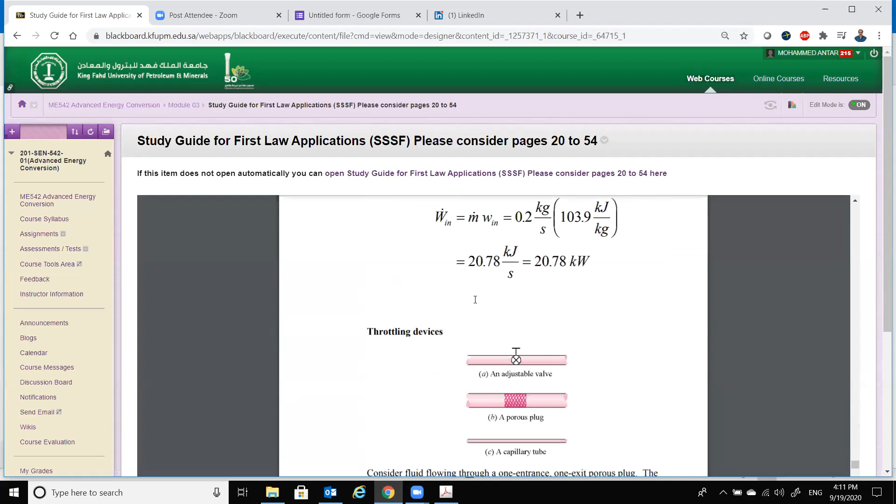Was it only considered for today's? No, that's a revision from the beginning. Yeah, that's what I was confused about. I was going through it, I said this is not only today's session. Yeah, no, it's not only today's, because actually what we did before was a preparation for what we are doing today.

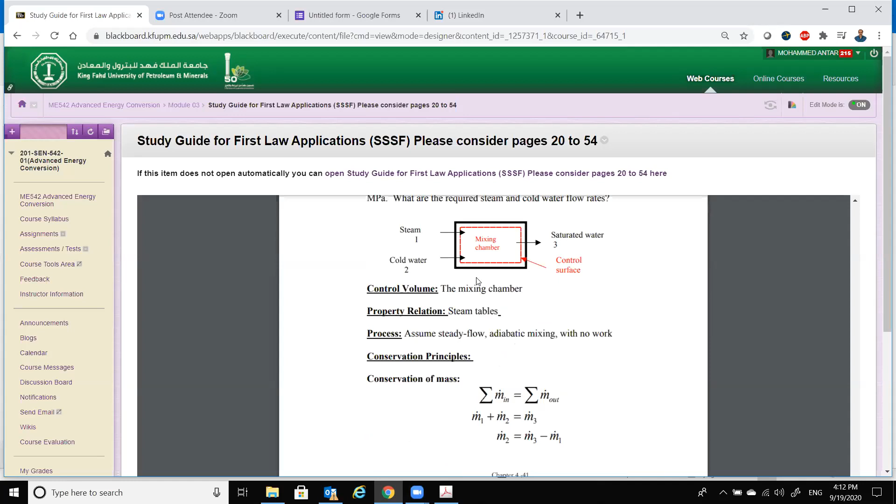Okay, so that means the exam will cover also all modules 1, 2, and 3. Actually, 1, 2 and 3 are like a building block. You are building something. First time we are talking about properties, and then we are talking about processes, and this cycle. The cycle will have properties and processes.

Great, understood, thank you Doctor. You are welcome.